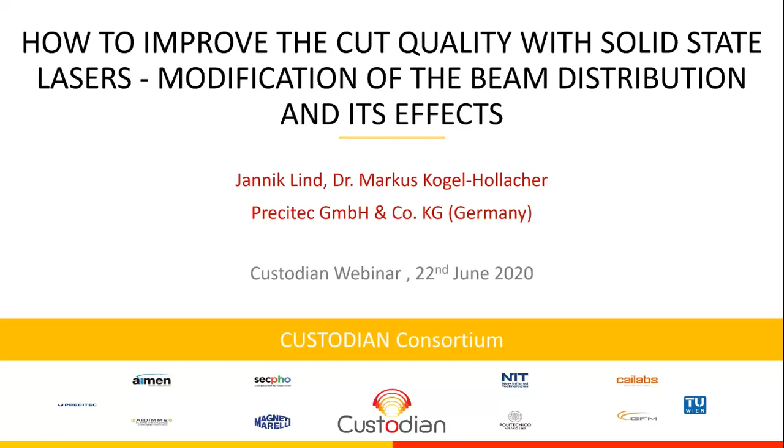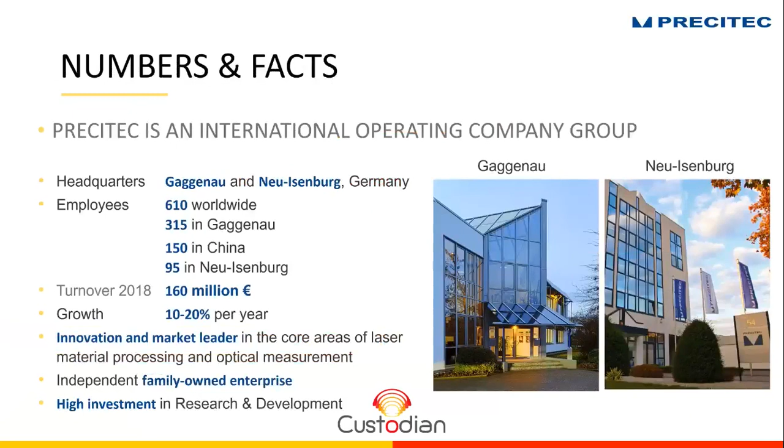My presentation covers information about why we intend to use the expertise of the Custodian partners to improve laser cutting. As you may know, Precitec is an international operating company with about 600 people working worldwide, so we are not small anymore, and we are not an SME anymore. But nevertheless, in Gaggenau, our headquarters, the main division and the main work we perform is related to laser cutting. It's about 70% of our revenue still in laser cutting.

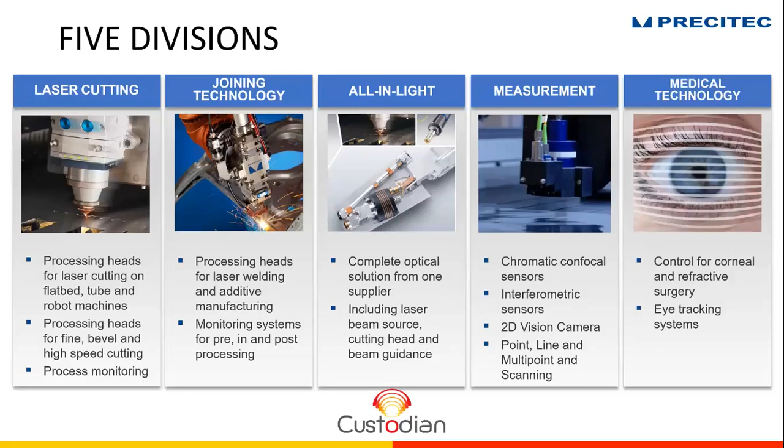Even though we have welding, even though we have sensors for both applications, cutting and welding, cutting heads are still very, very important. And what is definitely important for us is to improve the cutting process, to improve our tools, to improve the cutting heads. You see here some more of what Precitec is working on. You can easily go to www.precitec.com and inform yourself about the divisions, sensor technology, and all the rest. I would go into the cutting now.

The idea is to improve cutting with 1 micrometer lasers. Precitec was founded in 1971, quite some years ago. Actually, at the early beginning of Precitec in the 70s, the company started to work with laser cutting. And for those familiar with lasers, laser technology, and the history of lasers, they know that in those days...

The typical laser used for more or less everything was a CO2 laser. Precitec had CO2 laser cutting and sensors to do the distance control in laser cutting, but all in CO2. And about 15 years ago, fiber lasers, 1 micrometer lasers, put it like that, came into industrial applications, into the mind of people who planned laser applications.

People started to try to use those lasers for cutting as well, and they directly investigated some problems, really severe problems in the quality. So for a long time, 1 micrometer lasers and CO2 lasers ran parallel, but as the 1 micrometer lasers become cheaper and cheaper nowadays...

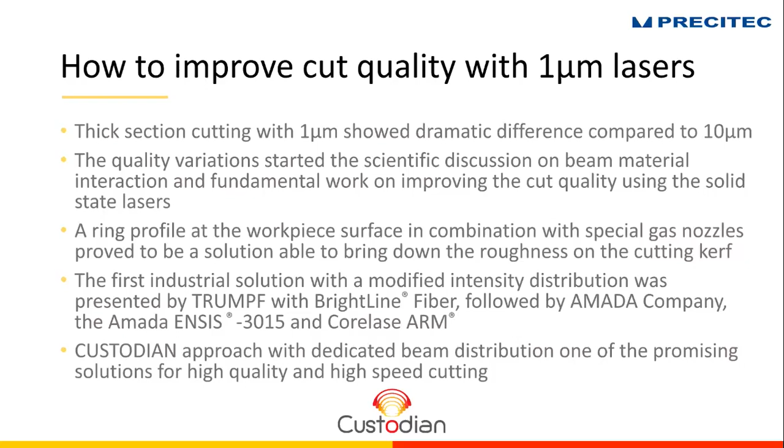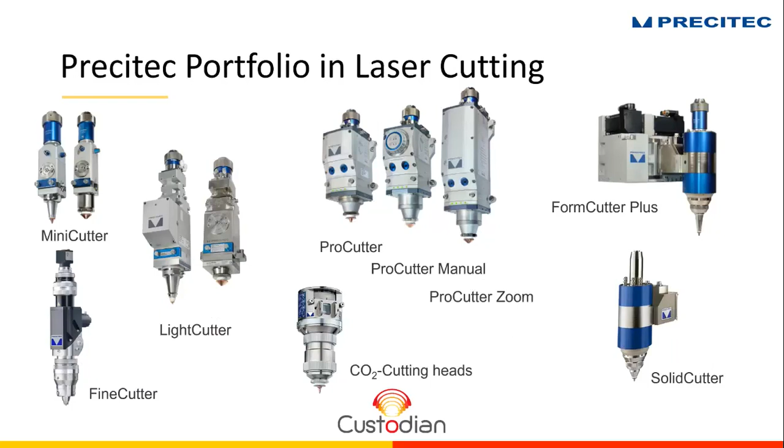You see our portfolio in laser cutting is quite big. What you see here is just one remaining cutting head in CO2, but the rest is all done for 1 micrometer lasers. And what you see as well is that if you go on Google and just type laser materials processing, you will easily find Precitec components displayed in all the pictures. So we have a worldwide reputation. That's why we need to take care in improving our tools.

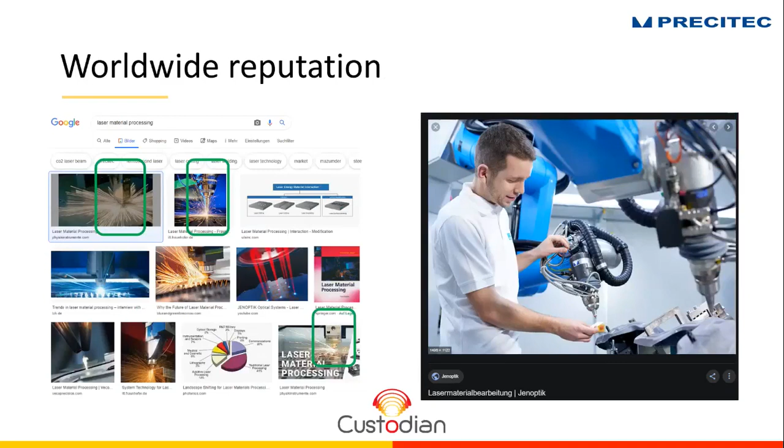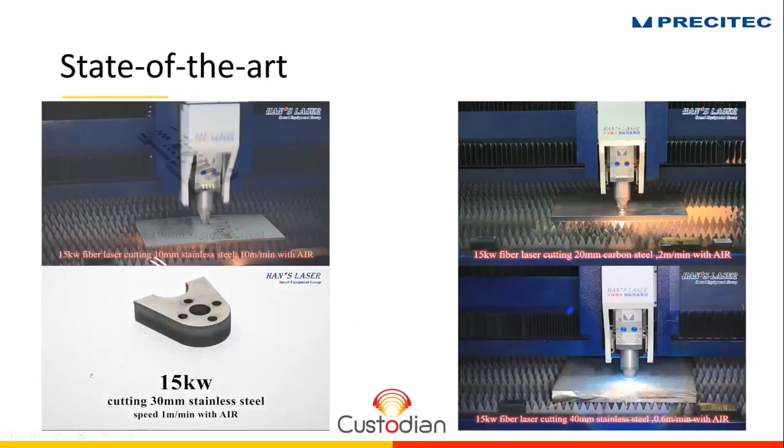So this is the state of the art we are talking about right now. I hope the video starts. So this is Han's Laser working with a Precitec cutting head - this actually is the cutting head which we use in Custodian as well. You see cutting processes on different thicknesses, sheet thicknesses, all with 15 kilowatts laser power.

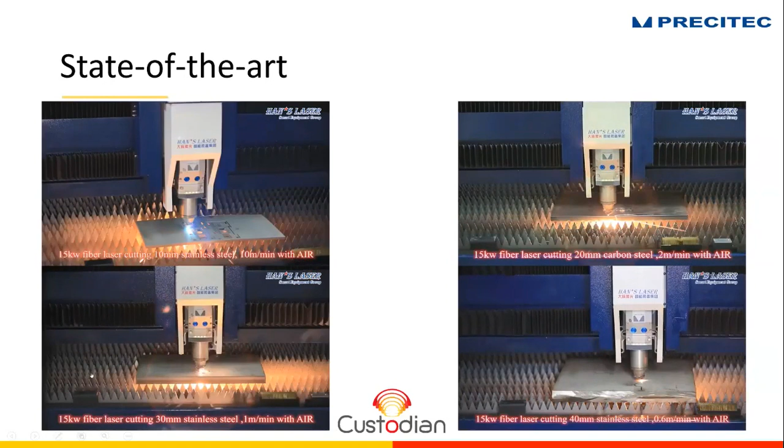You see that the thicker the material gets, the slower the cutting process is going. What we don't see here is the quality of the cut kerf. This is a high-speed cutting process here with a LightCutter. This is an industrial application as well. So it's very, very fast nowadays what cutting is going to be.

And you see that there are some very, very nice indications of which laser source you use, which is just visible for the expert.

But you see more or less on the cutting kerf if you use a CO2 or 1 micrometer laser. And so our demand is to stand high power. Our demand is to get thick sheets cutting with a high quality.

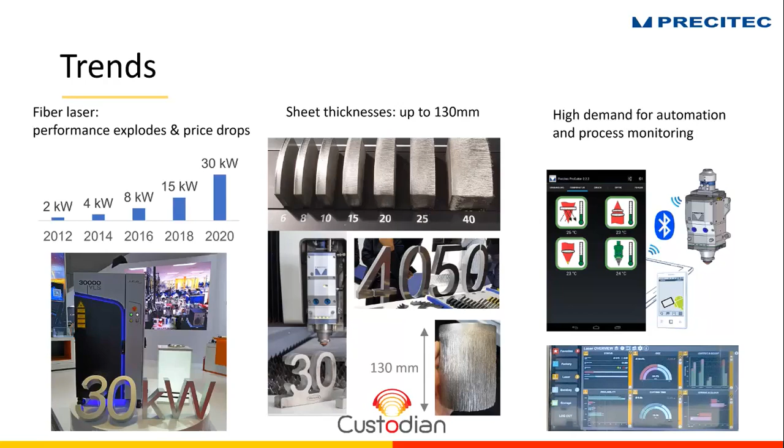As we have seen in the past, there have been some approaches on modification of the beam or the power distribution on the workpiece.

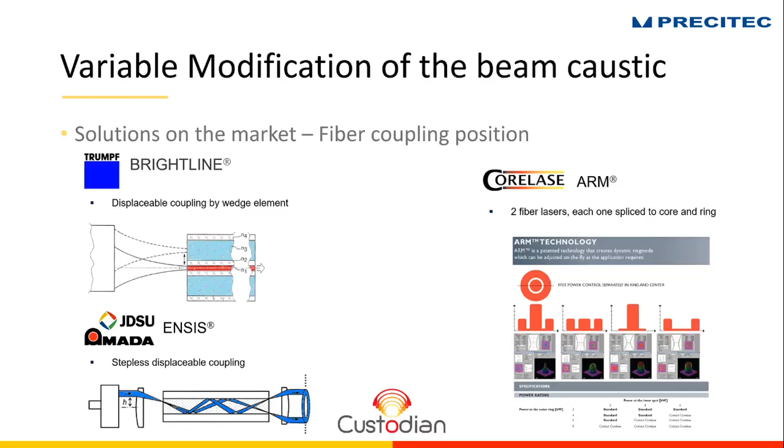And the first ones more or less were Amada with their ENSIS approach, where they did some changes in the in-coupling device to couple into the fiber end. And this, in fact, changes the power distribution on the workpiece surface.

We, together with others who don't manufacture laser sources, need to do the modifications on the side of the processing head. And we are not alone in that area. HIGHYAG, Air Liquide, Mitsubishi, or also Amada, they all are partners and competitors on the market which try to do some modifications of the optics inside the processing heads, in order to modify the beam on the workpiece surface and increase the quality.

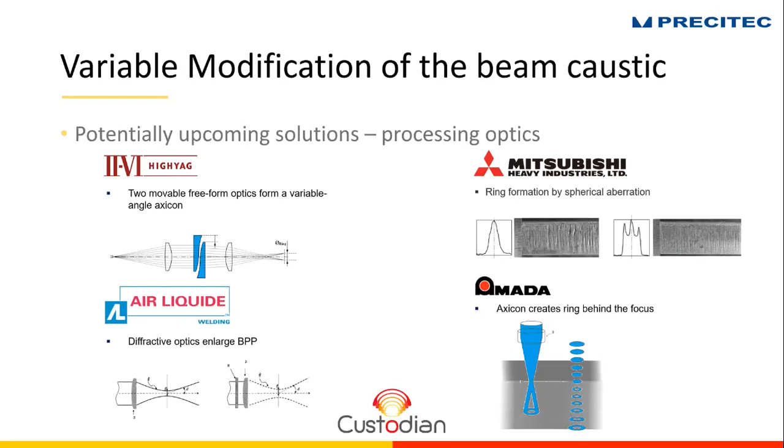And also there have been some modifications with respect to using dynamic tools, or in that case here, it was Fraunhofer IWS, which started to combine a ScanLab scanner with one of our cutting heads in order to very fast move the laser spot and make it so-called

static beam distribution. It's not really static, but it's very, very fast. So for the process itself, it seems to be static, and they could try, because using that galvo scanner, you can individually shape more or less your beam power distribution.

They tried out some very fancy beam distributions which had not been tested before. And all that, the laser source, the approaches in the cutting head, or that approach here by IWS, made us

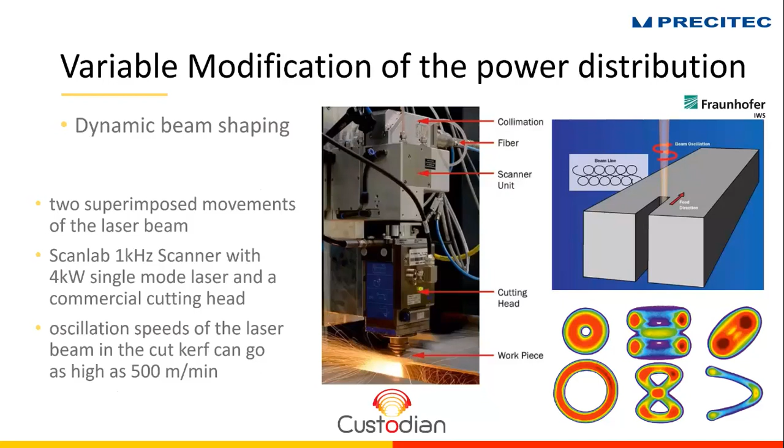aware, us as a Custodian consortium, that if we shape our laser, if we go and work on new ideas on shaped laser power distribution for specific applications, we need to go into laser cutting as well. And this is what our approach actually is in Custodian.

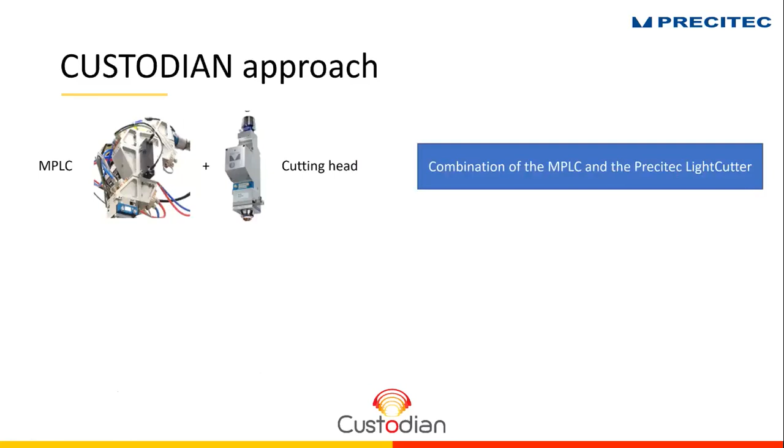We combine the MPLC system from Cailabs with one of our standard cutting heads, and we select different shapes of our laser in order to investigate the effect of those shapes on the process.

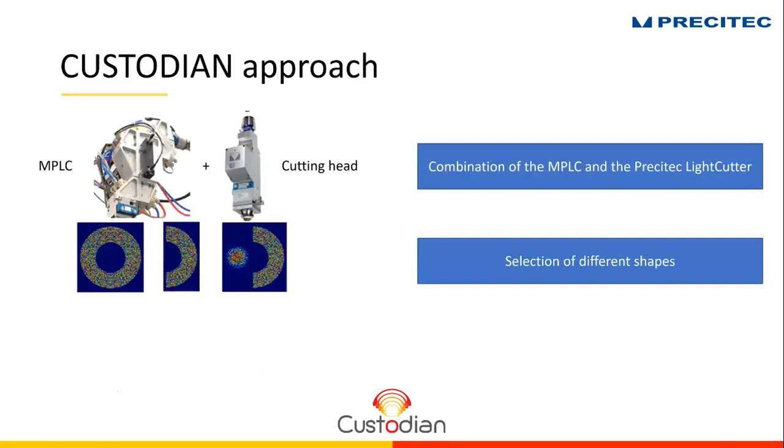And we are lucky that Yannick Lind, my co-worker in the project, has the possibility to work at the University of Stuttgart in order to do X-ray images of the laser cutting process.

So what we do, as Gwen already said, in September we will start in an X-ray chamber to prove the applicability of our shape, which we have decided on together with Cailabs and the Custodian partners, and to prove the use of that shape by really going very, very deep into the process, looking through the material into the cutting kerf.

And you see, this is one of the works of Yannick in his PhD thesis. Based on the grayscale he can extract from these videos, he can simulate the cutting kerf. He can simulate the geometry of the cutting kerf.

And so we can directly, if we switch on or off the MPLC, we can directly see the benefits of beam shaping in laser cutting.

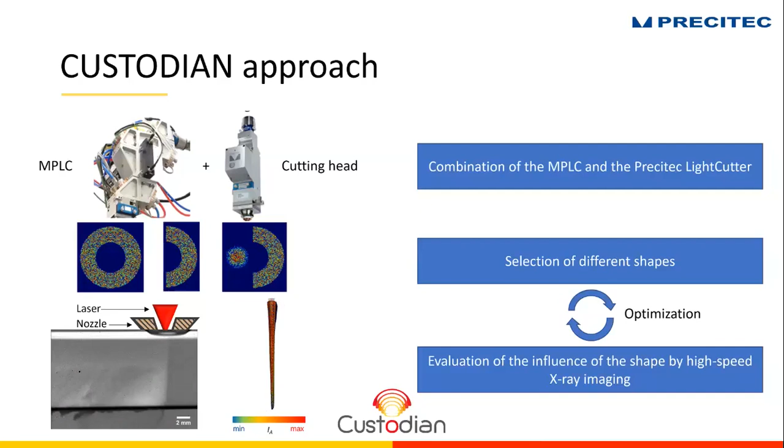So we see that for our task, for one of our tasks in Custodian, there is a trend in laser cutting which is asking for higher power, higher speed, and higher quality. And we see we can match these trends, the ideas of our customers, only if we shape our laser beam.

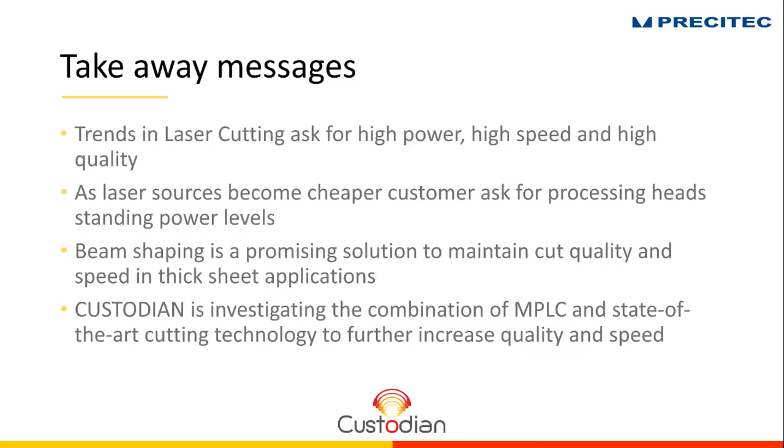This is not only true for thick sheets, this is also true for high-speed thin sheet cutting. And the Custodian investigation is to combine MPLC with the state-of-the-art cutting head and to really look into the process and to further increase quality and speed. Thank you very much for your attention.